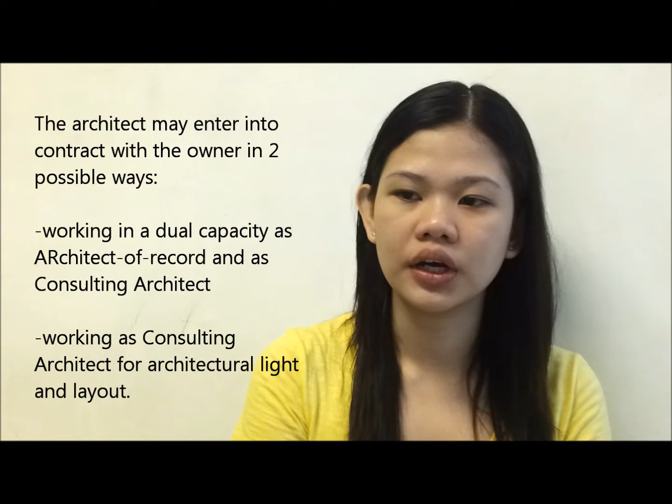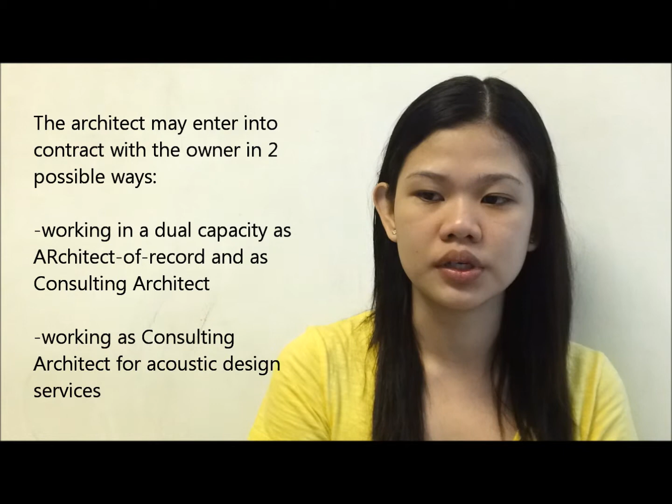Manner of providing services. The architect may enter into the contract in two ways: working in a dual capacity as the architect of record and consulting architect for acoustical design services, or working as a consultant architect for acoustic design and services only.

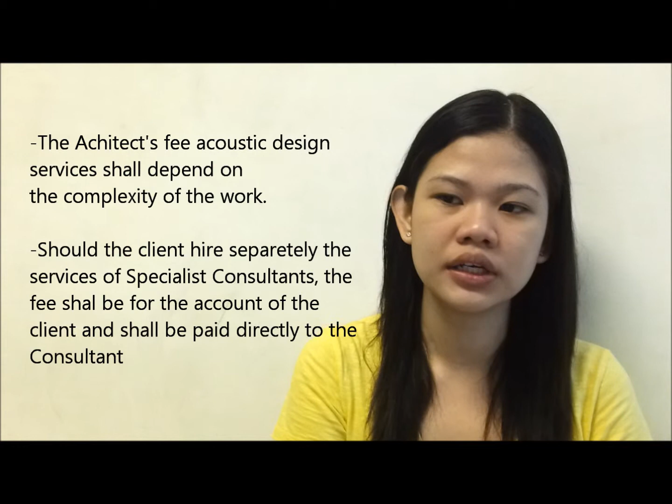Method of compensation. The architect's fee must be dependent on the complexity of his work undertaken. If the client hired another specialist consultant, their fee for the account should be directly paid by the owner. For specialized service, the payment of the architect's services shall be as stated in the architect's guidelines.

In the manner of providing services, the architect may enter into contract with the owner in two possible ways. First, working in a dual capacity as architect of record and as consulting architect for architectural lighting and layout design services. Second, working as consulting architect for architectural lighting and layout design services only. Under the method of compensation: first, the architect's fee for lighting, layout, and design services shall depend on the complexity of the works to be undertaken. Second, should the owner-client hire separately the services of specialist consultants, the fee shall be for the account of the owner or client and shall be paid directly to the consultant.

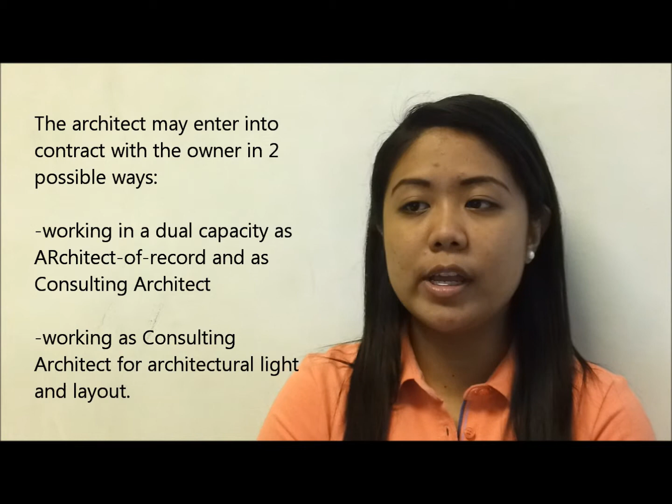In the manner of providing services, the architect may enter into contract with the owner in two possible ways. First, working in a dual capacity as architect of record and as consulting architect for architectural lighting and layout design services. Second, working as consulting architect for architectural lighting and layout design services only. Under the method of compensation: first, the architect's fee for lighting, layout, and design services shall depend on the complexity of the works to be undertaken. Second, should the owner-client hire separately the services of specialist consultants, the fee shall be for the account of the owner or client and shall be paid directly to the consultant.

Topic number 4, Comprehensive Planning Services. Comprehensive planning services is based on the concept of expanded planning services to include other activities necessary for the proper handling of the numerous components considered in the formulation of a master development plan.

Physical component, concerned with the land use and the changes which occur within the physical environment within the space where these activities take place. Economic component, concerned with the nation's assets and its management. Social cultural component, concerned with the people, their living conditions, and the seeking of ways to ameliorate it. Transport component, concerned with the movement of people and goods from one place to another. And legal and administrative component.

The architect as the environmental planner. The architect's ability to synthesize and organize into a whole various information relating to the user's needs, user's perception and expectations, site and climatic factors, construction technology, materials, cost, and other information has qualified him to take the lead role in any undertaking that cuts across various disciplines.

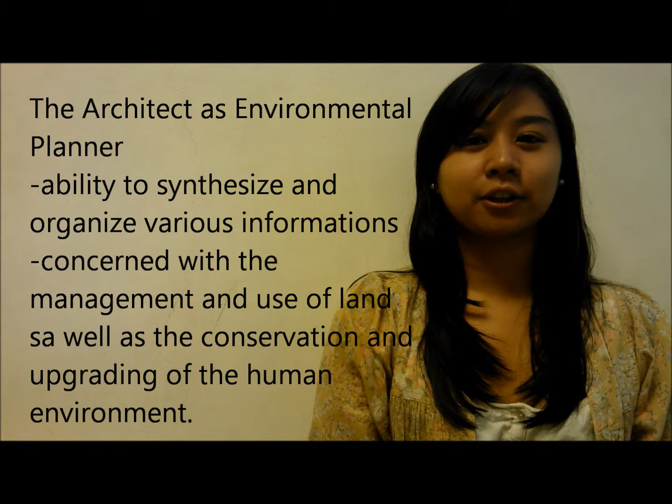Site planning and physical planning, including master development planning, subdivision planning, and urban design services.

Introduction. Physical planning refers to the orderly arrangement within a piece of land or property on which vertical structures, such as buildings, monuments, and the like, as well as horizontal developments, such as right-of-ways, open spaces, and activity spaces are to be proposed. Planning, as we know today, started with physical planning, with architects performing the lead role.

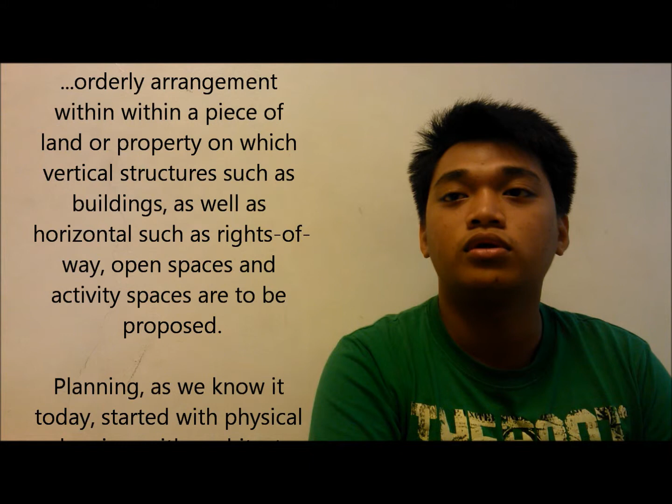The great cities of the world have taken shape mainly through the activities of visionary architects. Scope of services: all ideas and concepts have to be translated into physical plans before they can be implemented. It is the specialist architect who provides a multidimensional point of view to a two-dimensional physical plan.

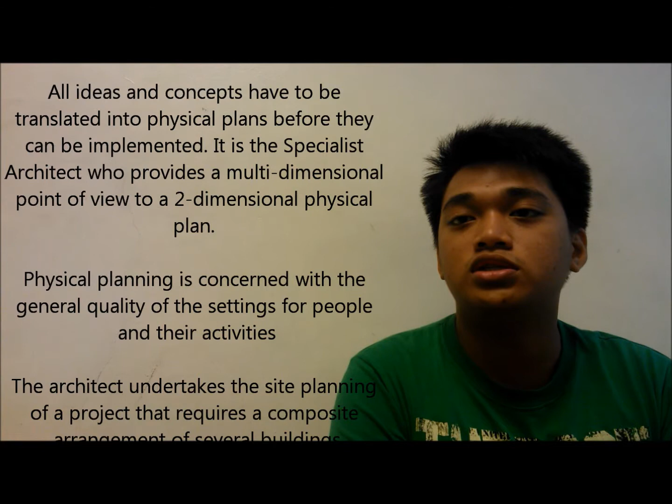Physical planning is concerned with the general quality of settings for people and their activities, buildings and other natural and man-made phenomena. The architect undertakes the site planning of a project that requires a composite arrangement of several buildings or structures and their requisite amenities, facilities, services, and utilities within a natural or built setting.

Should other services be required by the project, such as environmental studies, feasibility studies, market analysis, access and movement systems, impact analysis, and others, said services should be performed by duly qualified professionals, with the architect acting as the lead professional of the physical planning team.

Depending on the complexity of the project, the architect may hire additional special consultants whose expert advice may be needed to validate certain features of the physical plan. The fee of any additional special consultant needed in the project must be paid separately by the owner or the client.

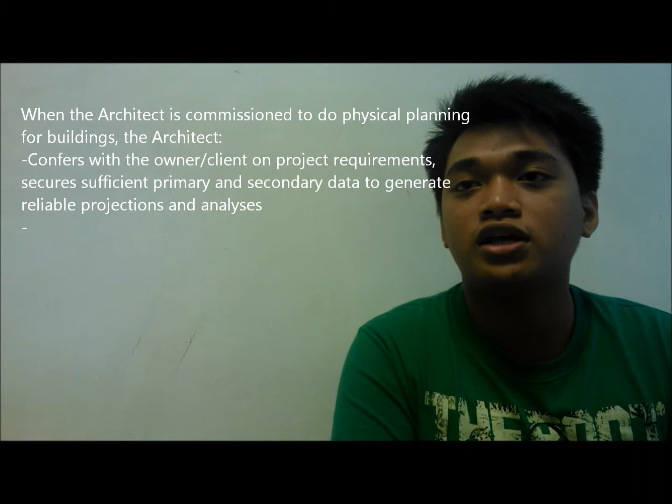The architect confers with the owner or client on the project requirements, secures sufficient primary and secondary data to generate reliable projections and analysis which are to be used as basis for the preparation of physical plans and designs, examines laws, ordinances, rules, and regulations affecting the project, such as code searches, and considers the best industry practices applicable.

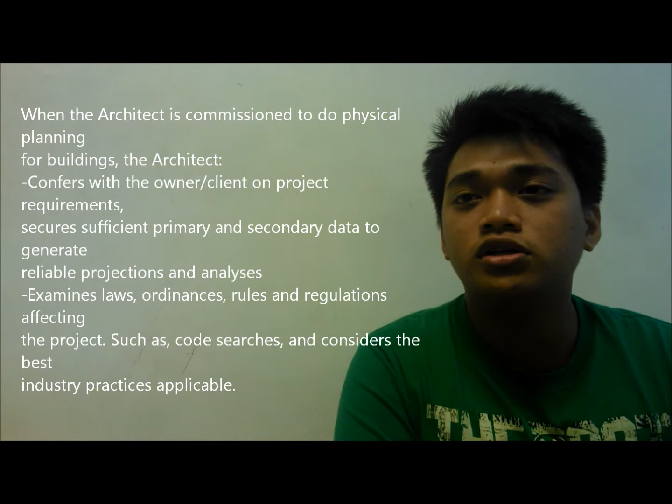Prepares framework and conceptual master development plans and reports from relevant information gathered by other disciplines. The architect also prepares preliminary up to detailed master development plans showing the site analysis and presents the same to the owner client, the government, and the public in consultations as needed.

Undertakes modifications, revisions, and changes as may be required by the owner or the client and the project within the engagement period. He also prepares the finalized plans, reports, and specifications needed for approval by the owner or client or proper government agencies concerned. Prepares the phasing of the construction with the concurrence of the owner and client. Prepares project cost estimates based on current cost parameters.

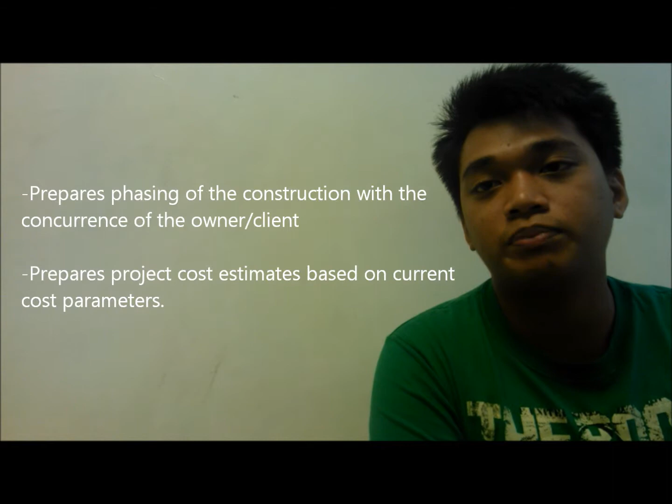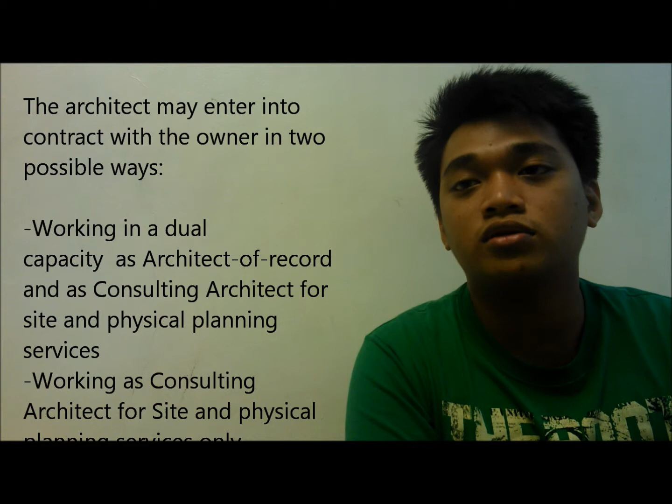Manner of providing services. The architect may enter into a contract with the owner in two possible ways: working in a dual capacity as an architect of record and as a consulting architect for site and physical planning services, or he may also work as a consulting architect for site and physical planning services only.

Manner of compensation. The fee structure for site and physical planning services by the architect shall be as stated in the architect's guidelines.